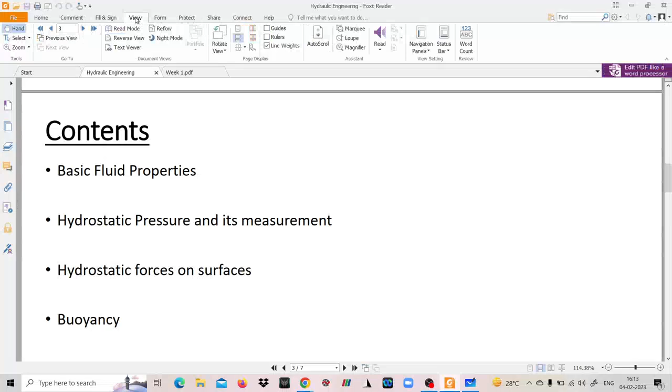Just one second. Yeah.

After that, we have hydrostatic pressure and its measurement. So what is the meaning of this term hydrostatic? It basically means when the fluid is at rest. So whenever the fluid is at rest, what are the different associated phenomena? What are the hydrostatic forces that the fluid incurs? All these things are covered in the second topic, which is hydrostatics, or when you say the fluid is at rest.

Then we have hydrostatic forces on surfaces. So when a surface is submerged vertically in a liquid, when it is submerged horizontally, when it is submerged in a liquid making some angle, all these cases come under hydrostatic forces on surfaces.

Then we have pressure and its measurement. What is actually fluid pressure? What is Pascal's law? How is fluid pressure measured using different types of manometers? All these things are discussed in unit 2 and unit 3. Then one very important aspect is buoyancy - what are buoyant forces, what is the center of buoyancy, how do you analyze the buoyant forces, all these things are discussed.

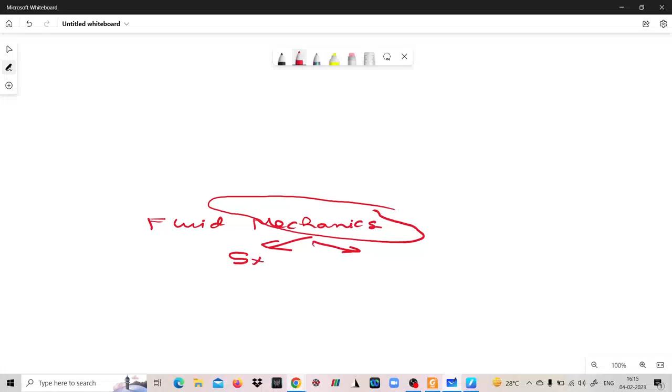Then we have fluid kinematics. Now this is important. Whenever we are studying fluid mechanics, or for that matter any mechanics, whenever we look at this word mechanics, there are two aspects to it. One is statics, and the other part is dynamics.

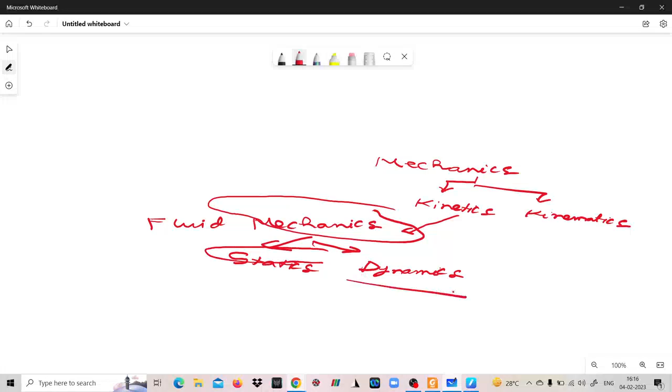So statics and dynamics - as the name suggests, but before that there is one broader aspect. Mechanics is basically divided into two subdivisions before statics and dynamics: one is kinetics, and then kinematics. This kinetics is further subdivided into statics and dynamics. So what is the meaning of these words? In mechanics, we study the force as well as the motion as well as the responsible forces. Kinetics deals with the forces, that is, whenever you apply some force on a body, what is the resulting motion - everything is considered in kinetics.

However, kinematics deals with only the velocity and acceleration, that is the motion portion, not the forces responsible for that motion. Kinetics means where you study the forces responsible. We have two domains basically: statics, when the body is at rest, and dynamics, when the body is in motion. So if you look at this, then we have fluid kinematics.

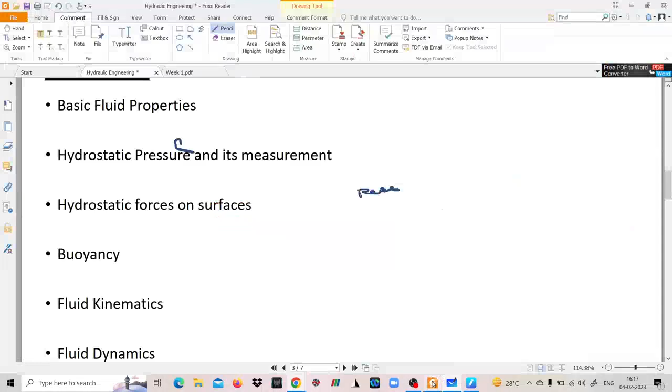In fluid kinematics, we study fluid velocity, acceleration field, potential function, stream functions. All these things are considered in fluid kinematics, but we do not consider the underlying forces. The underlying forces are studied in this particular chapter, which is fluid dynamics.

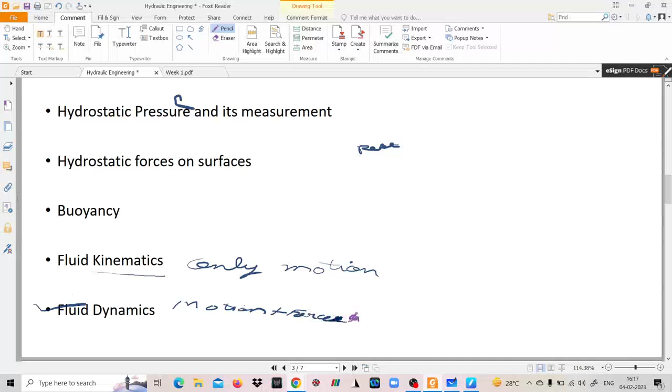So this kinematics is basically only motion aspects, only motion. And here in fluid dynamics it is motion plus the forces which are responsible for causing that motion, that is being studied in fluid dynamics. After that we have Reynolds transport theorem.

Now Reynolds transport theorem is again a very important theorem. Why is this a very important theorem? Because whenever you study fluid mechanics, there is a concept of system, and there is a concept of control volume.

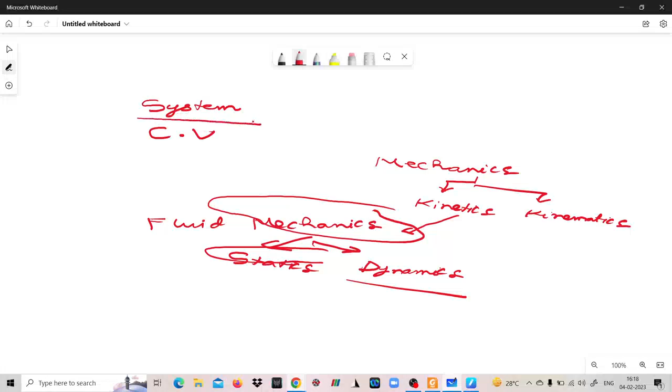Now what is a system? A system is basically, whenever you are studying or analyzing a problem, something whose mass is always conserved. However, in control volume, the mass flows across the surfaces, the mass flux is there.

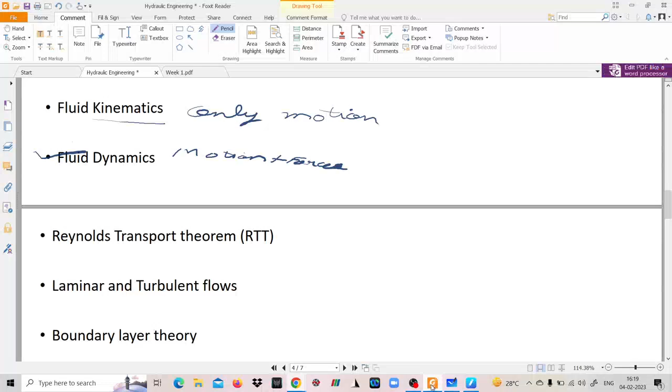So Reynolds transport theorem, that is RTT, gives you a mathematical form of how the system parameters are related to the control volume parameters. In simple words, all the conservation equations - conservation of mass, linear momentum and angular momentum - can be derived from the Reynolds transport theorem, putting appropriate terms for the different conservation equations. Then next we have laminar and turbulent flows.

Laminar and turbulent flows with respect to pipe are discussed in this course. For pipe flow, it is decided by the Reynolds number, given by rho v d by mu, where rho is the density, v is the average velocity across the pipe cross section, d is the diameter of the pipe taken as characteristic length, and mu is the coefficient of dynamic viscosity.

For laminar flow, this Reynolds number is less than 2000, but only in case of pipe flow. For turbulent flow, this Reynolds number is greater than 4000. And in between 2000 and 4000, we call it transition. Then we have boundary layer theory.

So what exactly is a boundary layer? You will get to know about all these things in detail when you go through the lectures. But just to give you a brief idea of what all is included in the course: a boundary layer forms when a fluid flows over a solid surface.

Now, when the fluid flows over a solid surface, there is something known as no slip condition, which you must have come across if you have already gone through the lecture of week 1. So what is no slip?

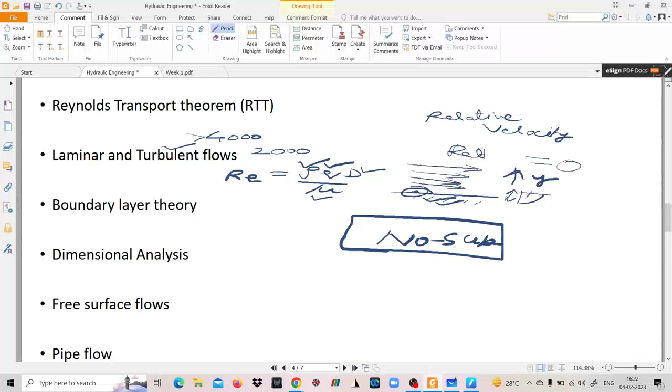Then we have dimensional analysis. Whenever we perform experiments related to fluid mechanics, say you want to study the motion of sediments which lie on a river bed, and suppose you want to perform some experiments related to it, then whenever you are conducting experiments, it is very important that this dimensional analysis is done.

Because you cannot replicate the actual dimensions of a river. Suppose you consider river Ganga or river Brahmaputra, you cannot replicate the actual river which has a very large width and length in your lab. So in our lab we use scale models, but how much that scale should be, so that the model you have constructed actually replicates or gives a good prediction for the actual field cases, you need to have some scale values of the parameters. So how that scaling is done depends upon this particular topic, which is dimensional analysis.

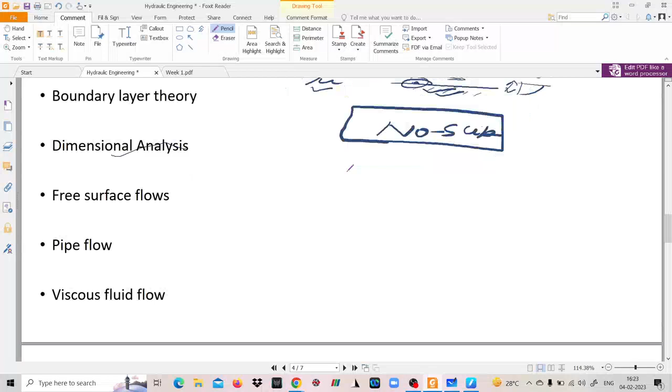Then we have free surface flow. What exactly is free surface flow? Free surface flow is also known as open channel flow. Whenever a flow takes place where the free surface is subjected to a constant pressure, and in most cases it is atmospheric pressure, we call it free surface flow. For example, flow in rivers or oceans are examples of free surface flow. In case of a pipe also, if there is a circular pipe...

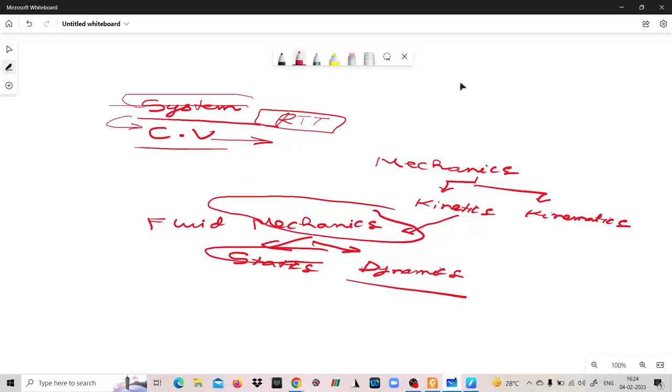Say there is a pipe, roughly circular, and it is not flowing full. This is the free surface, and the pressure here is atmospheric pressure everywhere on this surface, so this is also an example of free surface flow. But if the pipe is flowing full, then it is not a free surface flow, then it is a classic example of pipe flow.

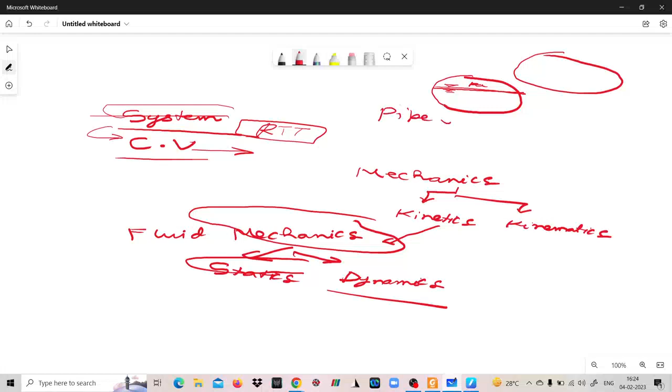After this, we have viscous fluid flow. Now, viscous fluid flow is a very fundamental chapter, because here you will be looking into the various deformations, how viscosity is important, and what are the consequences of fluid viscosity. All these things will be discussed in viscous fluid flow.

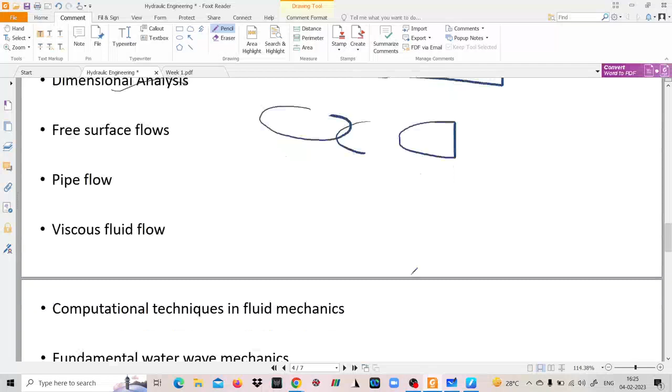Then the last two units, computational techniques in fluid mechanics and fundamental water wave mechanics, might be two new chapters which are generally not included in our college curriculum for civil engineering courses, but for those from ocean engineering or naval architecture background, they might have some idea.

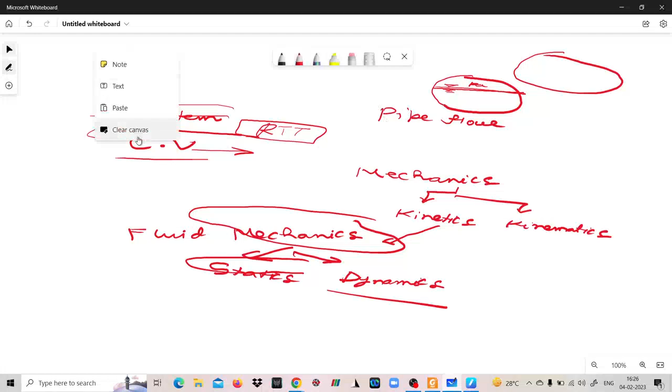Now, these computational techniques in fluid mechanics - nowadays lots of software are available which are used for studying various fluid flow situations. What these softwares basically do is, whenever we solve any problem on mechanics, we try to apply the conservation equations.

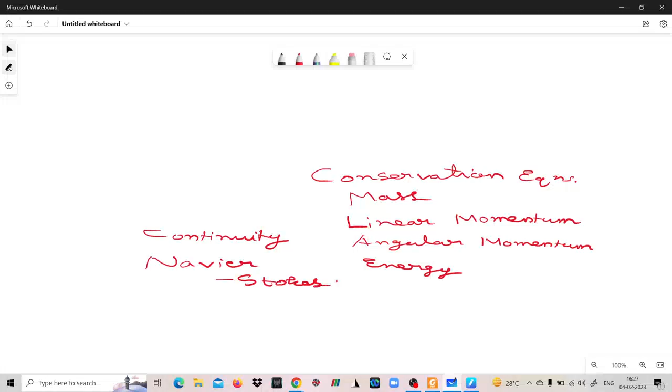Now, what are these conservation equations? These are conservation of mass, conservation of linear momentum, then we have conservation of angular momentum, and we have conservation of energy. In case of fluid, the conservation of mass equation is known as the continuity equation, and the conservation of linear momentum, after applying suitable assumptions relevant to fluids, is the Navier-Stokes equation.

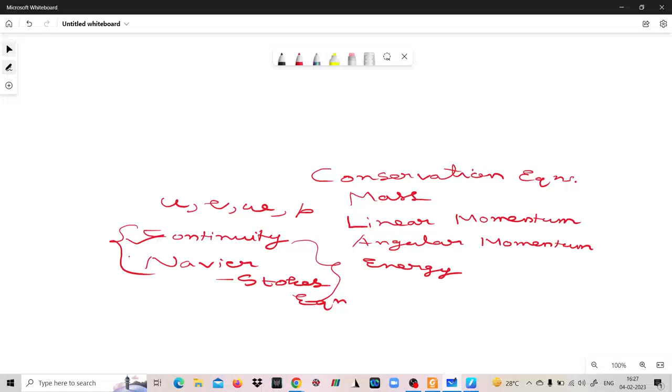So the continuity equation and Navier-Stokes equation form a system of differential equations where you have four different unknowns, considering incompressible flow: u, v, w, that is the velocity field, and p, pressure. We have four different equations - one is the continuity or mass conservation, and three equations are the Navier-Stokes equations, because momentum is a vector quantity, so for each direction we have one: along x-axis, y-axis, and z-axis. So these three equations plus one continuity equation give us four equations, and we have four unknowns.

However, exact mathematical solution to this system of equations is not available till date. In fact, whether a unique solution exists for this particular system of differential equations is still in question. So that's why whenever we study any complex fluid flow situation, we

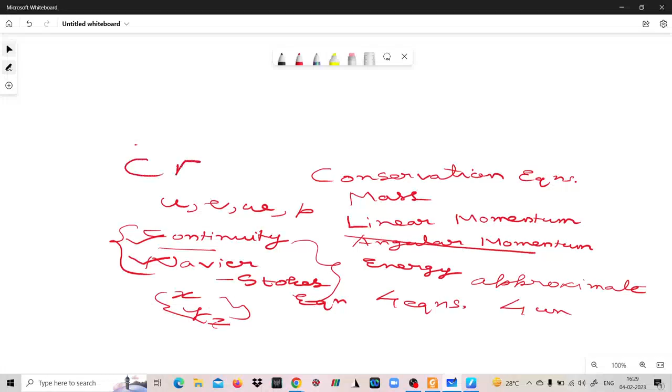try to obtain approximate solution to these equations by some suitable numerical method. So whenever we are using some numerical technique, we are not finding a solution which is exact, but an approximate solution. This entire approach is known as CFD or computational fluid dynamics.

Now you will see in this particular course, if we simplify the Navier-Stokes equation under certain assumptions, for example in pipe flow or flow between two parallel plates, this Navier-Stokes equation becomes so simple that for those cases there is an exact solution. But if you consider the entire Navier-Stokes equation in general, in totality, then there is no exact solution available, and we go for computational techniques.

Now there are different techniques available for the solutions, which include FDM, the finite difference method. Then we have finite volume method. Then we have FEM, the finite element method. Apart from this, there are many other methods like spectral element method, boundary element method. So there are different methods available. We also have some meshless techniques like smooth particle hydrodynamics.

So there are different techniques, but these are all approximate. All these techniques give approximate solutions to the Navier-Stokes equation. So a very basic introduction to these CFD techniques is provided in this unit, which is computational techniques in fluid mechanics. And the last one is fundamentals of water wave mechanics.

So water wave mechanics is relevant to ocean engineering. Now if you consider an ocean, apart from the water current, that is the flow, we also have water waves, and these water waves have significant impact on the flow hydrodynamics associated with any ocean or coastal engineering structures or any ocean engineering phenomena.

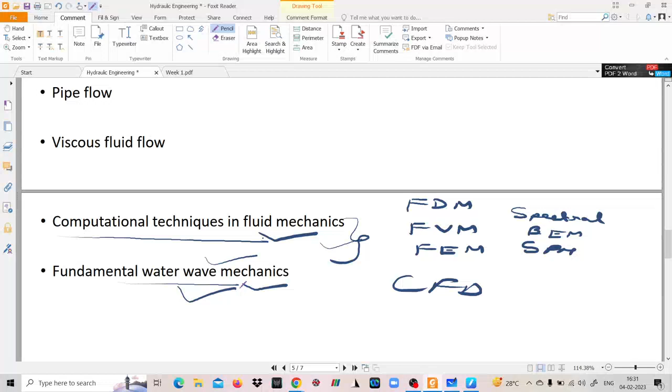Maybe in higher studies you'll find these subjects, but at UG level, if you look at the entire course curriculum, it is very difficult to get these two chapters in the curriculum of civil engineering. So these last two units are the specialties or USP for this course. So this is the fundamental.

Now, with a brief introduction to the contents of this course which you'll be learning, I would like to tell you that the live sessions will be based on the problems associated with each one of these units. Now what are the purpose of these live sessions?

It is very important, there should not be any confusion. The purpose behind these live sessions is to provide you with some additional contact hours for problem solving. As you know, at the end of every week's lecture, you need to solve some problems as part of the assignment. And finally, if you appear for the certificate exams, there also you need to solve problems. So these live sessions are meant to give you confidence where you will be solving some additional problems.

Now, during these live sessions, it is also intended to highlight the critical topics where you need to put some extra effort, not only for this particular NPTEL course, but also for other competitive exams like GATE or engineering service exams. So which topics need further effort, which topics are important, from which topics you can expect questions - all these things will be discussed.

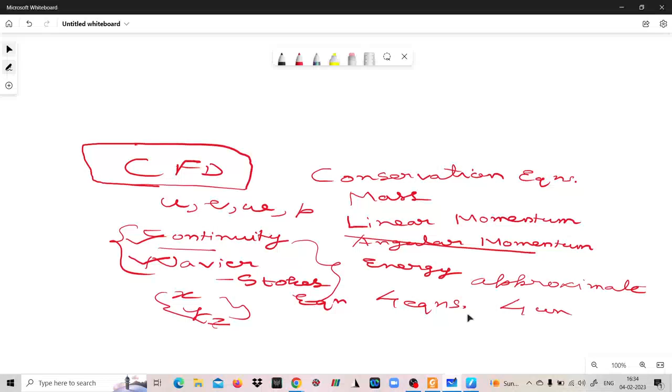So what is a fluid? To answer this question, we should begin from the states of matter. The three states of matter from the engineering point of view are solids, liquids and gases. The obvious difference that all of us know is that in solids the molecules are very closely packed. In gases, molecules are very widely spread, and in between we have liquids.

Now out of these three states of matter, you must know that gases and liquids are considered as fluids. So the question is, why are gases and liquids termed under one term which is known as a fluid? So with this there comes the basic definition of a fluid.

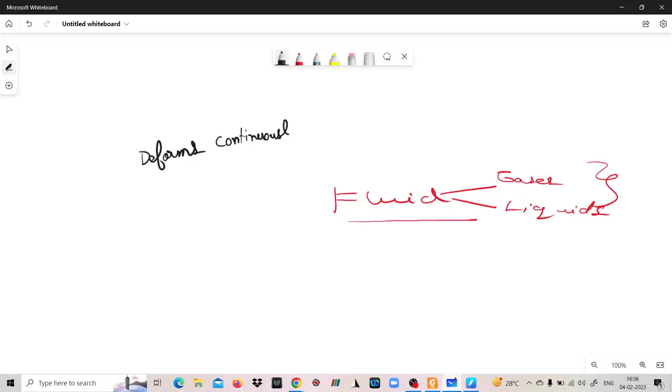What is the basic definition of a fluid? The basic definition of a fluid is that a fluid is a substance that deforms continuously under the action of a shear force, however small the shear force may be.

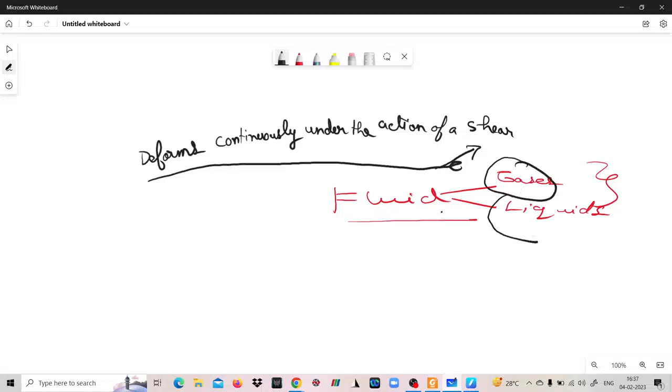So that is something which differentiates a fluid from a solid. This particular property, that it deforms continuously under the action of a shear force, is exhibited both by gases and liquids. That's why these two are termed together as fluids.

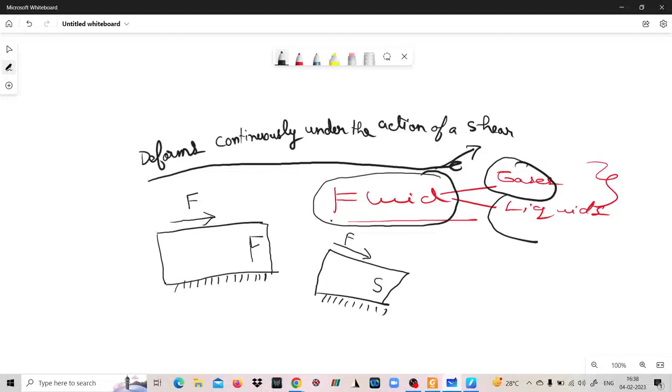Now if this is the case, let us look at the basic idea behind Newton's law of viscosity. You consider that there is a fluid block which is fixed at the bottom, and similarly there is a solid block which is fixed at the bottom. Now on the top surface you apply a shear force F of the same magnitude for both. So this is our fluid F, and this is our solid S. Dimensionally these blocks are the same, and you have applied a shear force of the same magnitude on both blocks, the fluid block and the solid block.

So what will happen? Shear deformation, or angular deformation, will start to occur. Here also shear deformation will occur. But what is the difference between these two?

Once you remove this shear force, in case of the solid, what will happen? It will come back to its original position. There may be slight deformation, there may not be. This will depend upon the elastic limit. Whenever you are providing the deformation, if it is within the elastic limit, it will regain its original position. And if it has exceeded the elastic limit, it will still come back, but with slight deformation.

But what will happen in case of this fluid? In case of the fluid, even if you remove the shear force, do you expect that this fluid will come back to its original position?

No, it will not come back, but it will keep on deforming. So in case of solids, if the shear strain is theta, then force, or shear stress (force by area), denoted by tau, is directly proportional to theta. Stress is directly proportional to strain.

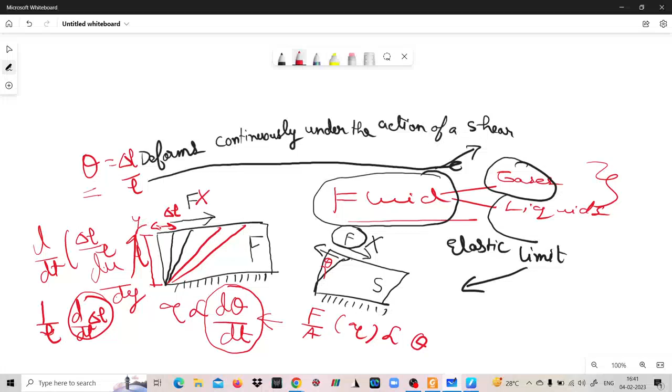So this is the basic idea of how Newton's law of viscosity came into picture. Your first unit covers basic fluid properties. Apart from fluid properties, Newton's law of viscosity is very important. There is a graph between stress versus rate of strain, which, depending on the shape of the figure, tells you very carefully whether it is a Newtonian fluid, a non-Newtonian fluid, or a Bingham plastic.

So it could be an ideal solid or an ideal fluid. Just to recapitulate, the graph looks something like this: tau (shear stress) on one axis, du by dy on the other. A line passing through the origin of this graph represents a Newtonian fluid. These others are non-Newtonian fluids — something like this is an ideal plastic, this is a Bingham plastic, this is not an ideal plastic.

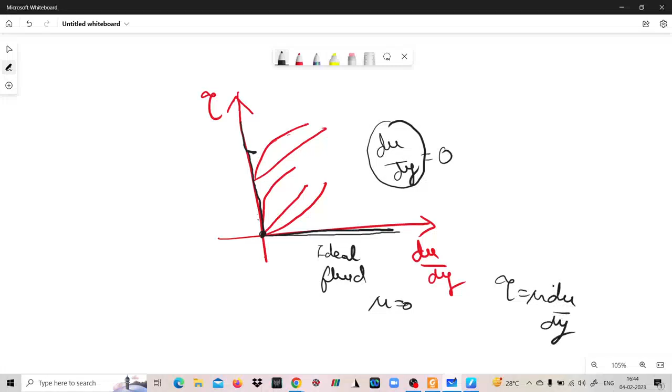Or if you consider the most general form for shear stress, it is tau equals A plus B times (du by dy) raised to the power n. Here B is nothing but mu. If mu equals 0, then tau equals A. This represents the plastic fluid.

But if it is not an ideal plastic, and if it is a Newtonian fluid, then we can write this as tau equals mu du by dy. And if mu equals 0, then whatever the value of du by dy, tau is always 0. So the du by dy axis represents an ideal fluid, and the tau axis represents an ideal solid.

This graph is very important, because in competitive exams you might be given this graph with points labeled A, B, C and D, and in the options it will ask what is A, what is B, what is C, what is D. So this particular graph is very important.

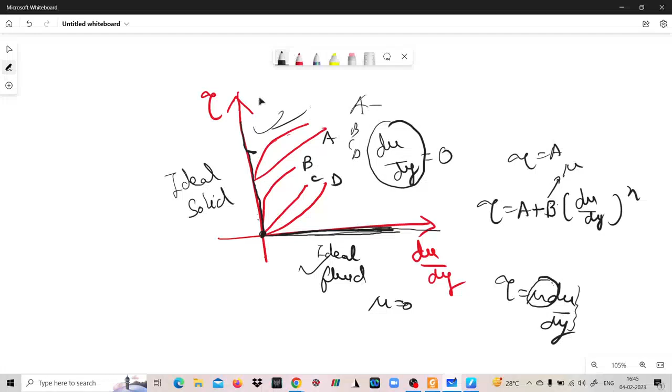Now the next part of the question: what is the difference between fluid mechanics and hydraulics? Fluid mechanics is basically the study of fluids, both fluids at rest as well as fluids in motion as a whole. A comprehensive coverage of the entire fluid flow phenomenon is fluid mechanics.

But hydraulics is different. Fluids consist of both gases as well as liquids, but in civil engineering, what are the most important topics where fluid mechanics is important? It is river flow, ocean engineering or coastal environments, flow in porous media like groundwater hydrology, rainfall. Everywhere water is involved - the various aspects of force and motion of water, that is termed as hydraulics.

However, in order to understand the motion of the fluid, it is no different from understanding the behavior of water, or the behavior of a fluid in general. Only when you substitute the density and viscosity with the values for water, you get hydraulics. Otherwise everything is the same. One important property is that we consider water incompressible, so all the equations for incompressible fluid mechanics are valid for water. Hydraulics can be considered as a subset of fluid mechanics, where we deal with the flow of water. That is the only difference.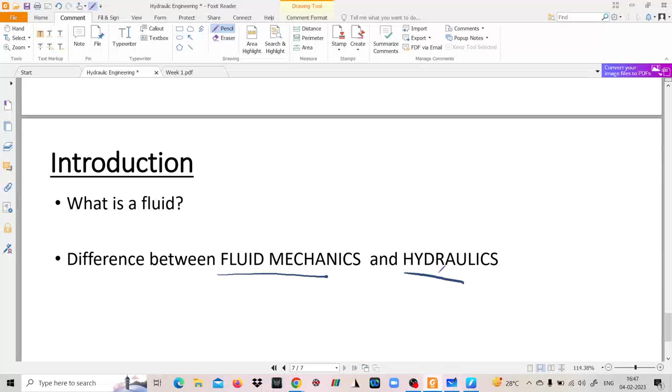So with this our introduction is over. Next we'll move to week one's problem solving session. I hope you have gone through the lectures of week one, and with this let us start with the problem solving part.

So this is the first problem. You have to determine the mass density, specific volume and specific weight of a liquid whose specific gravity is 0.85. So you have to determine the mass density, specific volume, specific weight, and the specific gravity is given to you. Please try this problem. I'm giving you a few minutes, and then we'll discuss the solution. It is a very simple problem, and if you have gone through the lectures already, this should not take much time. So please try from your side, and then we'll discuss the solution.

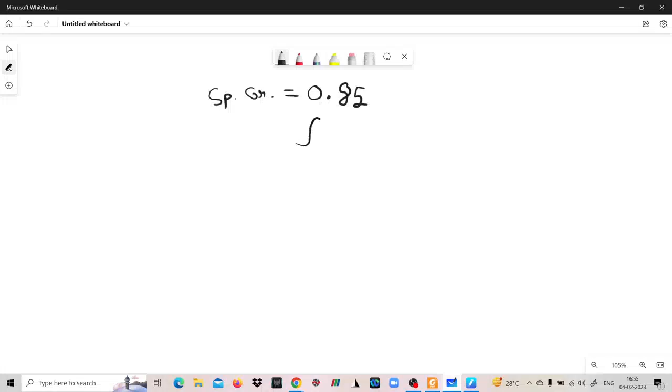So in the problem, it is given that the specific gravity is equal to 0.85, and you are asked to calculate the density, then the weight density, which I'm writing as gamma, and then the specific volume, which I'm writing as V cross. So these three things you need to calculate: rho, gamma, and V, that is specific volume. Now you need to start with the only value given to you, that is the specific gravity.

So what is specific gravity? Specific gravity, say I'm writing Sg, is the ratio of the density of any matter under consideration divided by the density of water. Now here it is very important to remember one thing.

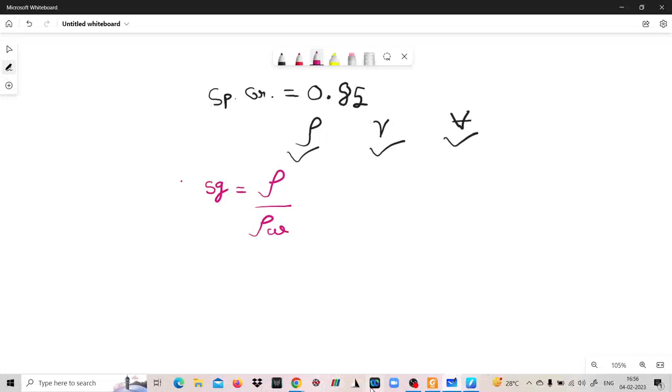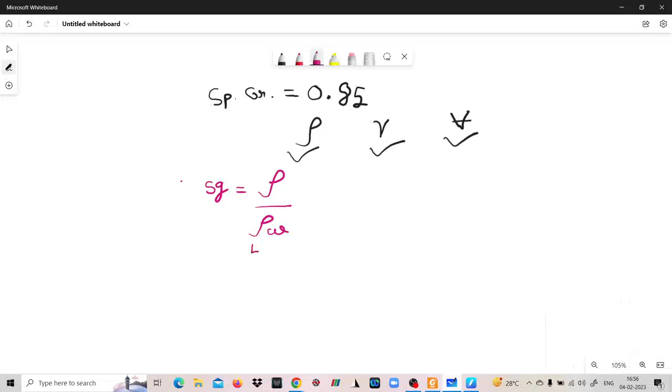Dinesh obtained 850 kg per meter cube, which is fine. But when he obtained this value, what is the assumption? The assumption is that the density of water at standard temperature and pressure is 1000 kg per meter cube. So if nothing is given in the question, you can safely take this value as 1000 kg per meter cube, but you should always read the question very carefully.

For this problem, since nothing was mentioned about the density of water, taking a value of 1000 kg per meter cube is okay. But sometimes in questions, separately the density of water might be given as 998.2 kg per meter cube, or sometimes the specific gravity with respect to sea water is given. So you should read the question very carefully.

Don't blindly use the value of 1000 kg per meter cube. In most cases it will not cause any problem, but sometimes in competitive exams they may intentionally supply you with a value of density of water different from 1000 kg, because our tendency is to generally use 1000 kg. So in order to create confusion, they may supply a different value. Whatever value is given in the question, you use that value. Otherwise you can use 1000 kg per meter cube.

So the specific gravity, rho by rho w, is given as 0.85. For this particular problem, since nothing else is given, you can safely assume the density of water to be 1000 kg per meter cube. Therefore rho will be equal to 0.85 into 1000, which is rightly mentioned by Dinesh, it is 850 kg per meter cube.

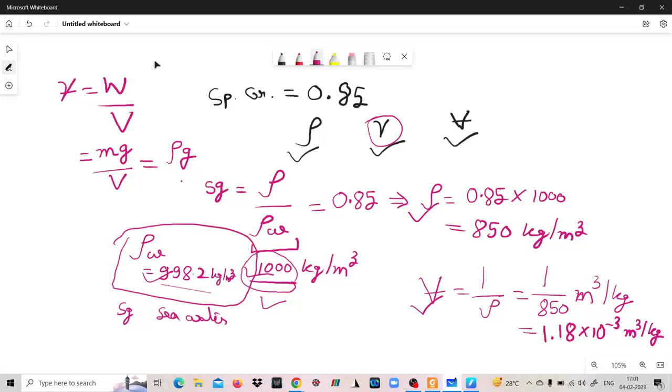Now weight per unit volume, weight can be written as mass into acceleration due to gravity divided by volume. Mass by volume is density. So basically rho g is this specific weight. So gamma equal to rho g is the specific weight.

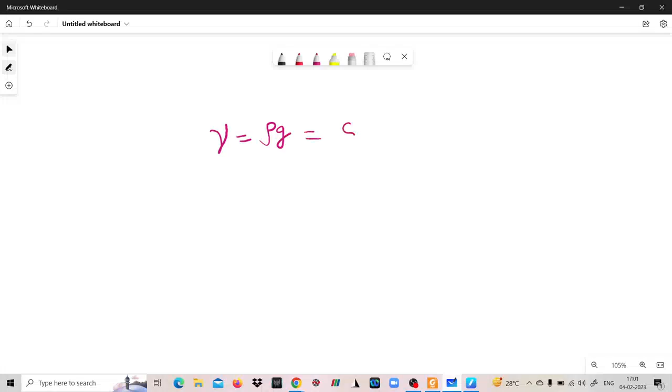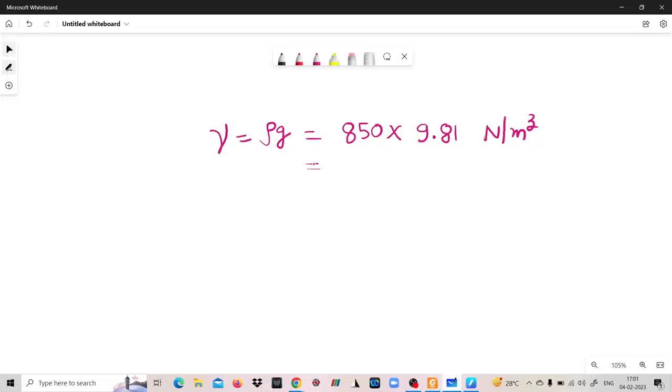The value of rho is 850 kg per meter cube, into g is 9.81. Since everything is in SI, it will be Newton per meter cube. 850 into 9.81 is around 8338.5 Newton per meter cube, or if expressed in kilonewton, it will be approximately 8.34 kilonewton per meter cube. You can recheck the calculations, no problem, but the idea is this.

Now as Dinesh has already mentioned the answer, density is 850, fine. Specific weight is 8.3 kilonewton per meter cube, fine.

Here I would like to mention one more thing. Similarly to the case of density of water, the value of g, if you sit for competitive exams, they will definitely supply you with the value of g. Whatever value of g is supplied to you, you use that value. If a value of 9.81 meter per second square is given, you use that value.

Or if a value of 10 meter per second square is given, use that value. Before solving the problem, especially for competitive exams, please look carefully at the values and units that have been supplied to you. Whenever you read a question, make a list on a rough page of all the variables and their values given to you - variable v1, v2, v3, whatever is given. This will avoid unnecessary errors, so please do that.

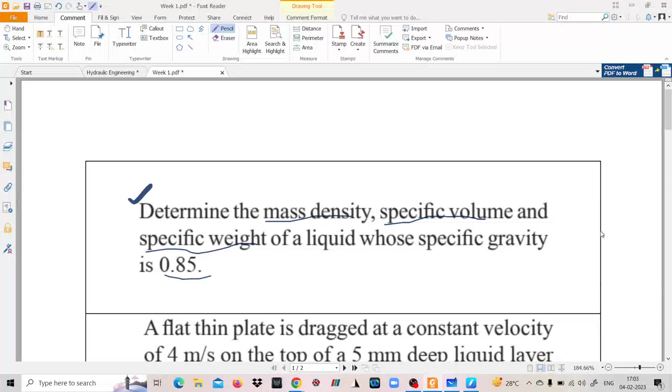For the second problem: a flat thin plate is dragged at a constant velocity of 4 meter per second on top of a 5 millimeter deep liquid layer of viscosity 20 centipoise. If the area of the plate is 1 meter square, find the drag force. Assume the variation of velocity in the liquid to be linear. The answer is already supplied here, 16 Newton. As I told you, the final answer is not important - the approach, or how we have solved the problem, is of utmost importance here. Please take some time and try to solve this problem, then we will discuss it.

And wherever possible, please draw a rough problem sketch. Try to visualize the problem and then go for solving. Look at the data carefully - what are the units? Viscosity of 20 centipoise is given, so how will you use that viscosity? What exactly is that viscosity - whether it is dynamic viscosity or kinematic viscosity - everything you need to decide by looking at the unit. Look at the question carefully and then we'll try to solve the problem. Take some time, try to solve it from your side, and then we'll discuss.

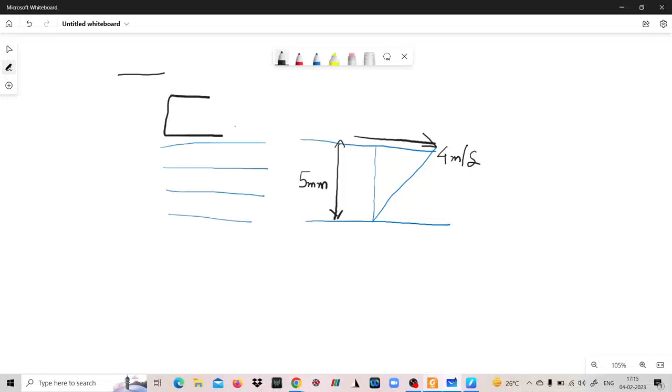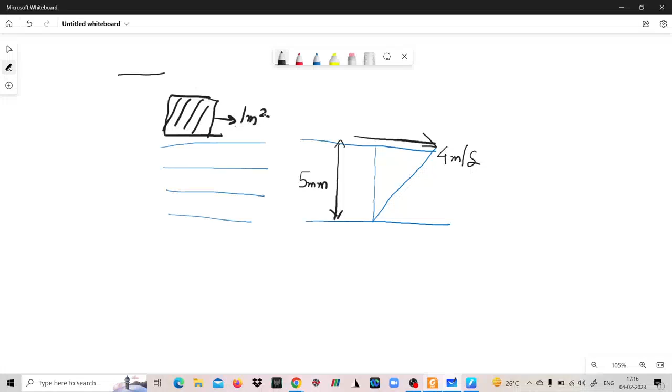It is given to you that the area of the plate, that is, since we are only looking at the side view, if you look from the top, the plate will have some area. The area of this plate is 1 meter square.

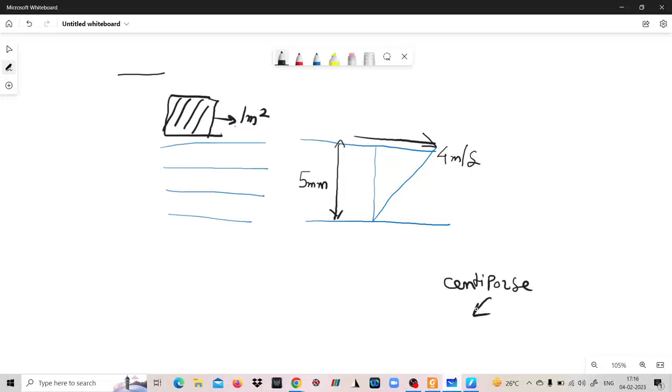And apart from that, the viscosity is 20 centipoise. Now centipoise, what type of viscosity is this?

Is it dynamic viscosity or is it kinematic viscosity? What type of viscosity is this? Dynamic or kinematic? Dynamic.

Good. So this is the unit of dynamic viscosity. The unit of dynamic viscosity in SI unit is Newton second per meter square, and if you convert this into CGS, in short we write that as poise. Now in the question it is given as 20 centipoise, if I am not wrong.

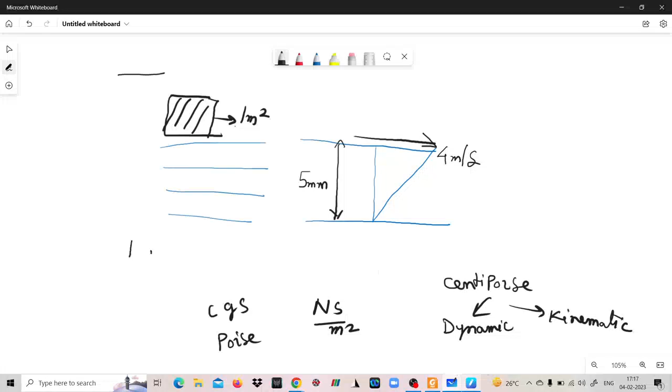So what is the relationship between poise and Newton second per meter square? 1 poise is equal to how much Newton second per meter square? Dinesh, how much have you used? 100. Poise and Stokes, sorry, poise and the relation between poise and Newton second per meter square.

Is it really 100? I don't know, sir. Okay, Dinesh, fine. You don't know, that is a different part. But for the problem that you solved and obtained the answer, what value did you use? Did you use one poise is equal to 100 Newton second per meter square? Is this what you have used? Okay. Then I don't know how you obtained the answer.

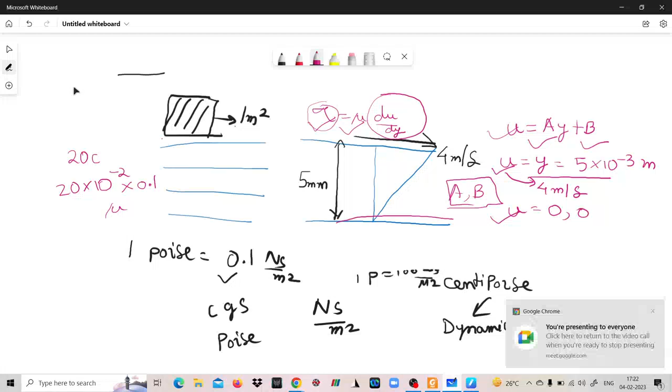So u is equal to a y plus b. Now the value of u is 4 meter per second at y is equal to 5 into 10 to the power minus 3 meter, and u is equal to 0 at y equal to 0. So this will be u is equal to 0 at y equal to 0. So when you put y equal to 0, b will be equal to 0.

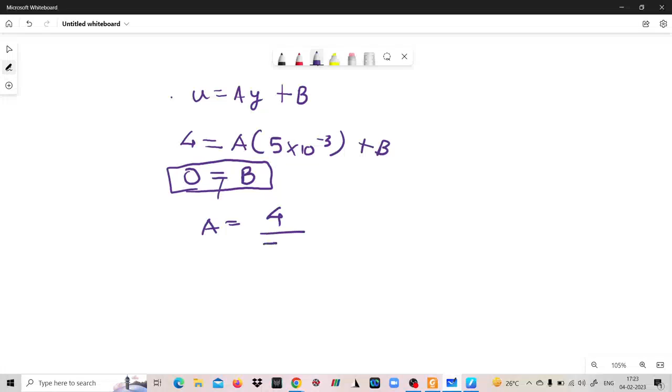And what is the value of a? Value of a is equal to 4 divided by 5 into 10 to the power minus 3, or I can write this as 10 to the power 3.

Let us not skip this thing. 5 into 10 to the power minus 3. This thing can be written as, if I multiply 10 to the power 3 here, I have to multiply 10 to the power 3 in the denominator as well. So this becomes 1, finally we're left with 4 into 10 to the power 3 divided by 5. This is the value of a. So how much is this? 800.

So this value is 800. So what is the variation? u is equal to 800 times y, where y is in meter and u is in meter per second. So what will be del u by del y? Del u by del y will be 800. And what will be tau? Tau is equal to mu del u by del y, or du by dy.

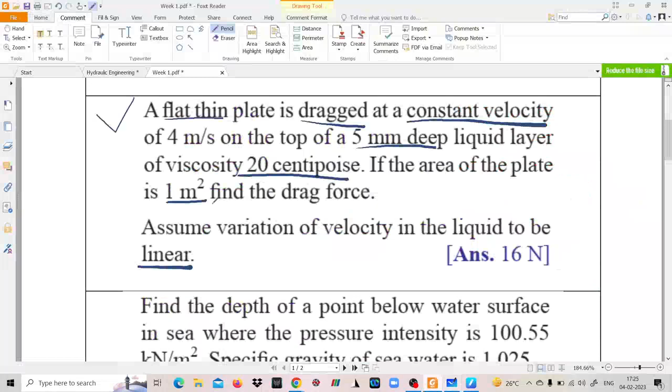But this is not all. Why is this not all? Because in the question it is given that you have to find the drag force, but this is only stress. Shear stress is equal to the force with which the plate is dragged divided by the area of the plate. In the question it is given that the area of the plate is 1 meter square. So that's why the drag force F is equal to tau into A. The value of tau is 16, the value of A is 1 meter square. So finally this gives 16 Newton.

Now is this problem clear? Now Dinesh, I don't know how, by using a factor of 100, you got the answer. That is fine, but if you used the conversion factor of 100, it is not correct. The correct conversion is 1 poise is equal to 0.1 Newton second per meter square. And for kinematic viscosity, the CGS unit is Stokes, and 1 Stokes is equal to 10 to the power minus 4 meter square per second. Now is the problem clear?

Okay, you did it as it is, but why did you write 100, Dinesh? When I asked about that conversion factor, you wrote 100, no? Or maybe that was by mistake, you wrote 100. Anyways, it is fine.

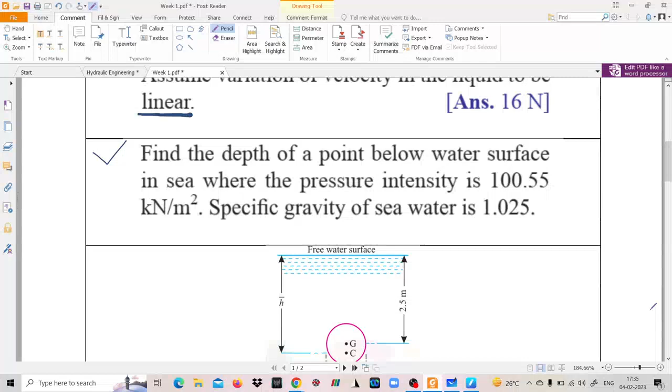So in the question it has been given that, say this is the free surface of the sea, and you have to find the depth to a point P where the pressure intensity is given.

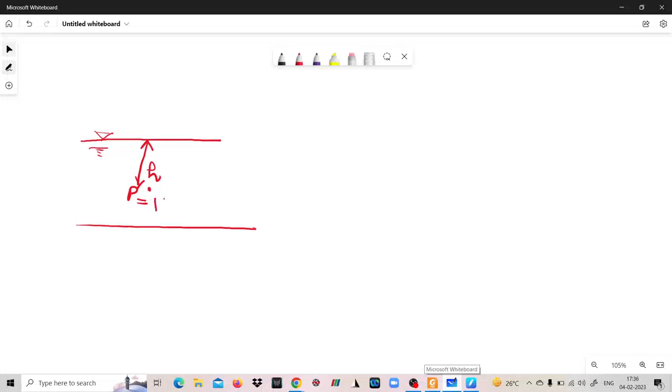The pressure intensity is 100.55 kilonewton or 10 to the power 3 newton per meter square, i.e. pascal. Now nothing has been clearly mentioned in the problem whether it is...

...in terms of absolute scale or in terms of gauge scale. You don't have to worry about this in your exams, because there it will be specifically mentioned. But since here it is not mentioned, I intentionally selected this problem just to make you guys realize the importance of these two terms.

If you remember, what is the difference between gauge pressure and absolute pressure? Say this is the pressure scale, this line represents absolute zero, and this line represents the atmospheric pressure.

Now whenever you have to determine the pressure at any point, suppose here, if you are measuring this pressure with respect to absolute zero, that is from vacuum, then this pressure is known as the absolute pressure.

I am very much sure that you know all these things, but just for clarity and recapitulation purpose I am repeating this. Now, if you are measuring this pressure with respect to the atmospheric pressure, then we call this gauge pressure.

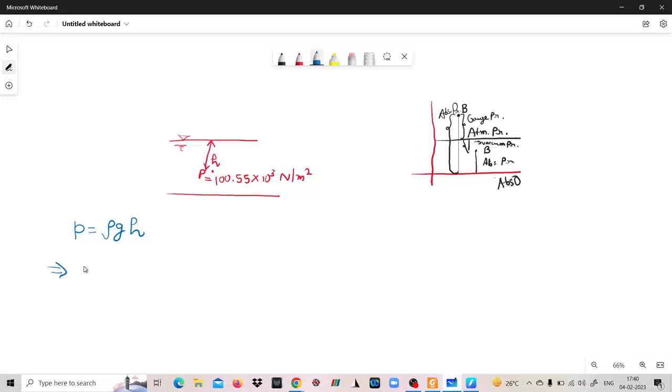Okay, fine. So in gauge scale we know that the hydrostatic pressure distribution is P equals rho G H. The value of pressure given to you is 100.55 into 10 to the power 3 newton per meter square.

Rho is not directly given, it is given that the specific gravity of seawater is 1.025. So if the specific gravity of seawater is 1.025, then the density of seawater will be 1.025 multiplied by 1000, which gives us the density rho, where 1000 is the density of water.

As I told you, if nothing is mentioned, you can safely assume the density of water to be 1000 kg per meter cube, and G as 9.81, multiplied by this height H.

So from this, what will be the value of H? The value of H will be 100.55 into 10 to the power 3 divided by 1.025 into 1000 into 9.81, equal to how much? Let's see.

100.55 into 10 to the power 3 divided by 1.025 into 1000 into 9.81. So this is 9.99 meter approximately. So this is from the gauge pressure point of view.

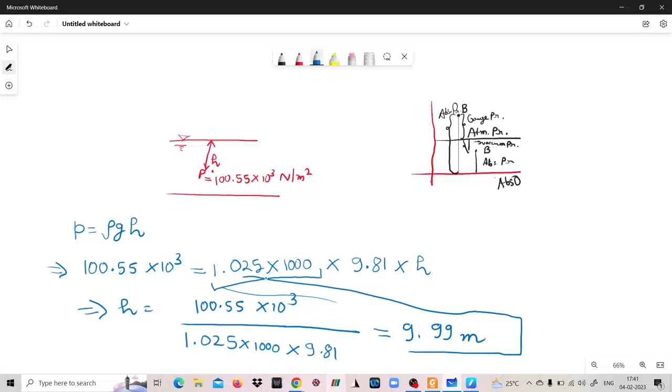Now if you consider the atmospheric pressure consideration...

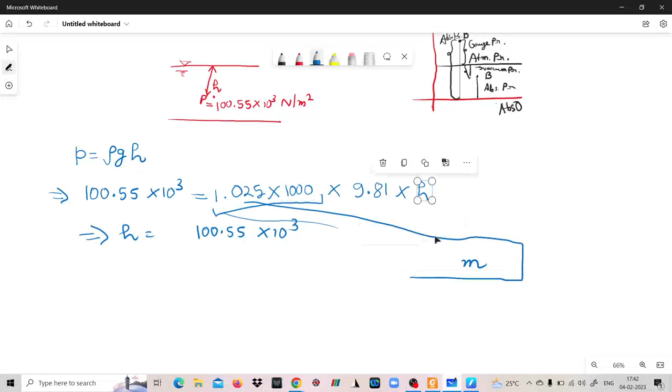I'm not clearing the canvas because the figures are already here, so I'm just deleting the calculations with respect to the gauge pressure.

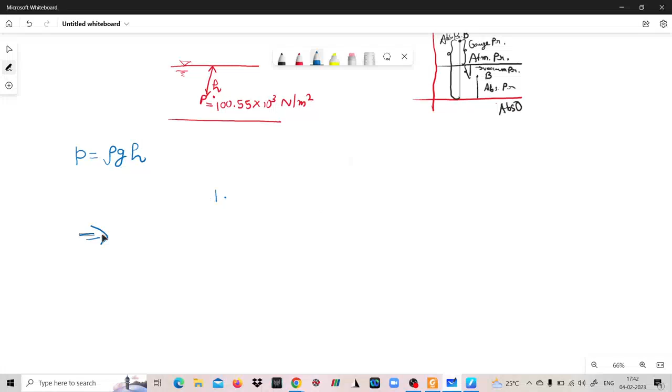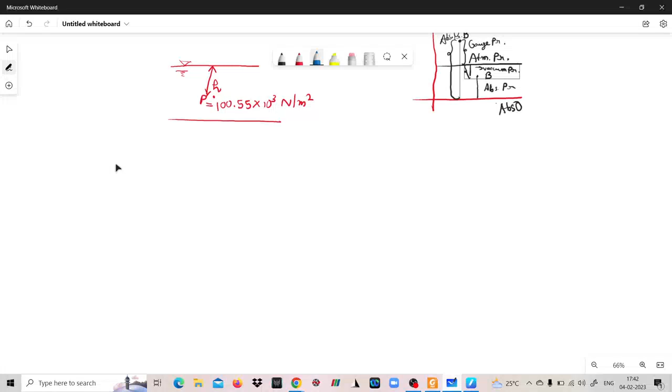Okay. Now, with respect to absolute pressure calculations, let us take this one.

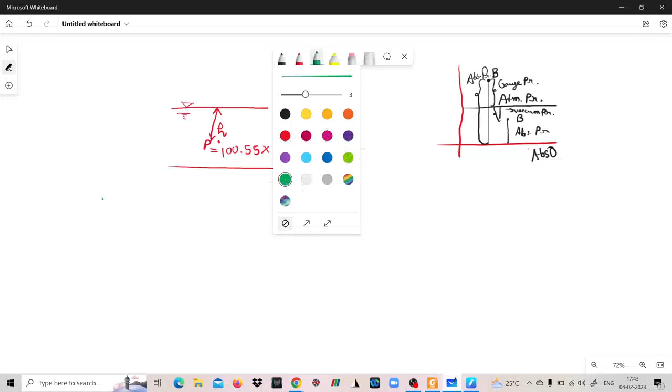On the top of the free surface, it is atmospheric pressure, PA. So at this point P, it will be atmospheric pressure plus the pressure intensity that is given to you. So that will be the absolute pressure. What is absolute pressure? Pressure in excess of the atmospheric. So atmospheric pressure is there plus the pressure because of this fluid lying above this point P.

100.55 into 10 to the power 3 is the pressure at the point. Let us say we don't know whether this pressure is absolute pressure or gauge pressure. We can check this. How we can check means it is not a direct check. What is the value of atmospheric pressure? What is the value of approximate atmospheric pressure? Standard atmospheric pressure? Anyone?

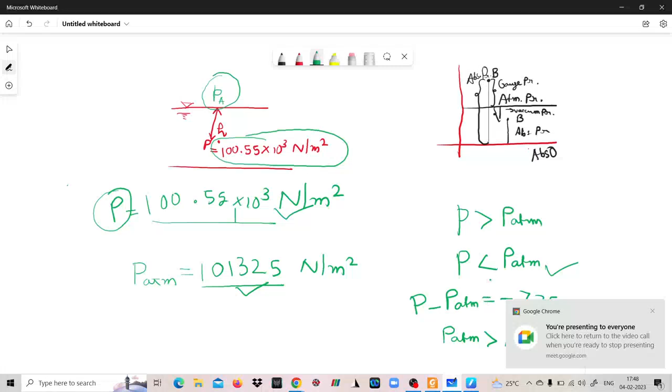So if this condition is correct, then what happens? It means that on a diagram like this, if this is the atmospheric pressure, point atmospheric pressure is greater than P, it means that point P lies here. But is it possible physically? Because it has been already mentioned in the question. See, there are two scenarios possible.

The pressure at point P is less than P atmospheric. One possible explanation is whatever is given to you is actually the gauge pressure measurement. If this is absolute pressure, it means the point P lies below the atmospheric pressure line, which is not possible. Why is this not possible? Because physically this point lies beneath the free surface of the sea. So definitely the pressure is higher, if you think logically, but the calculations are telling you otherwise.

So the only reasonable explanation is that this pressure intensity P given to you is in gauge scale. There is no need to use the atmospheric scale. And if you want to use the absolute scale, then you need to add atmospheric pressure, which will give you the value of absolute pressure at point P. So the answer is 9.9. Is it clear?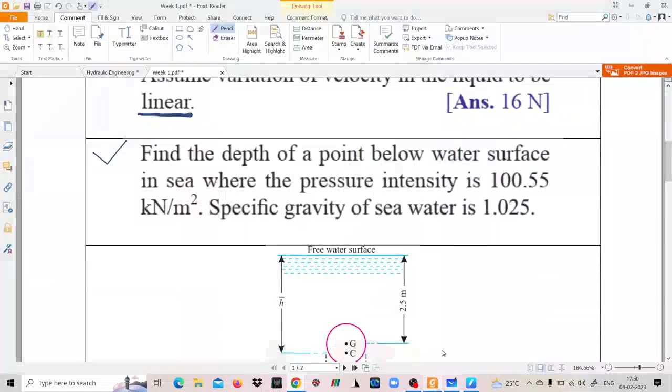Okay, fine. So you need to be very much careful. So let's come to the next problem, which is the last problem for today's session.

A figure is shown here where there is a circular plate submerged vertically inside water. This is the free water surface. The center of the circle lies 2.5 meter below the free surface of the water, and the diameter of the circle is 1.2 meter. You have to determine the total pressure and the position of the center of pressure.

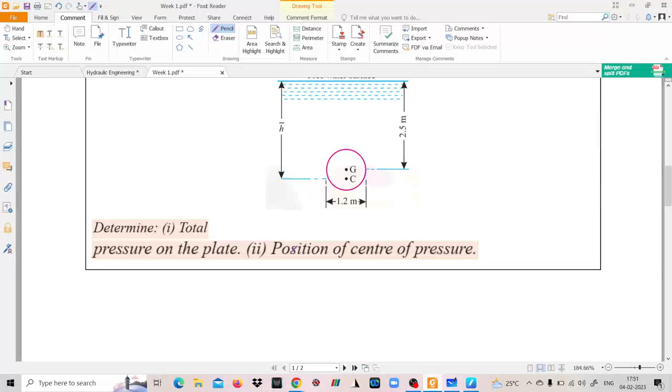So this is basically from the chapter hydrostatic forces on surfaces. It's a very simple problem. You have to directly use the formula, nothing else. So please find the answer and tell me what is the answer. So this is the case.

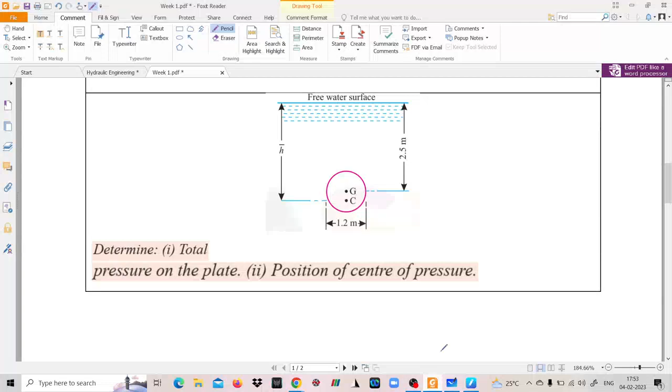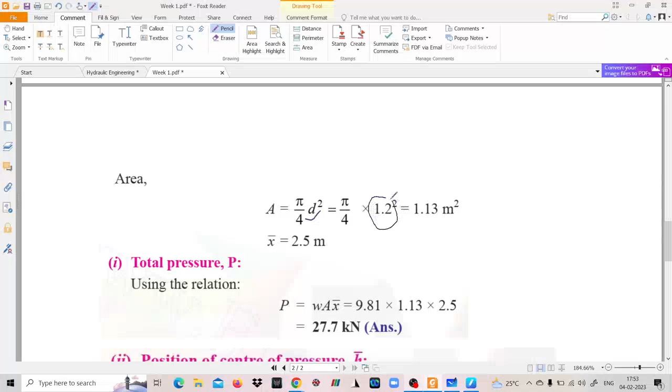Okay, let's see the solution because not much time is left. The area of the plate is given by pi d square by 4. As given in the question, the diameter of the plate is 1.2 meter, so the area is 1.13 meter square.

Now it is given in the question that the center of the circle lies 2.5 meter below the free surface and the plate is vertically submerged. For a circular plate, the center of gravity and the center of the circle of the geometrical shape coincide. So the position of the CG below the free surface, shown by x dash, is 2.5 meter.

So what is the expression for total pressure force? The expression for total pressure force, F, is equal to rho g A x dash.

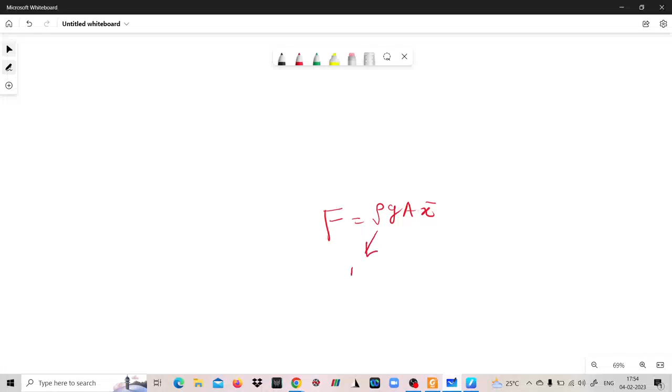In the question it is given that the fluid is water, so the value of rho is 1000 kg per meter cube, and the value of g is 9.81 meter per second square. The area of the circle is pi d square by 4, where d is 1.2 meter, and the value of x dash is 2.5 meter. So everything you need for computing the total pressure force is given to you.

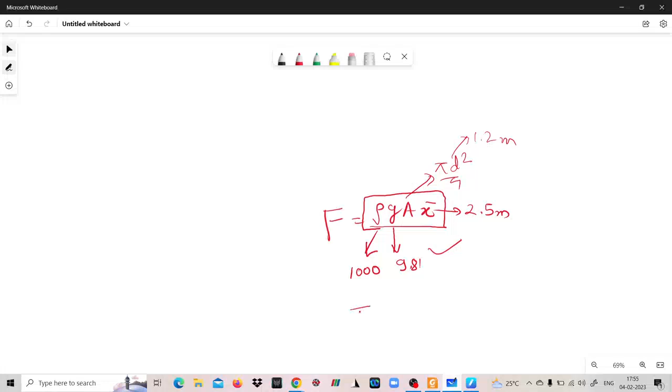So the value is how much? Rho is 1000 into 9.81 into area, which is pi into 1.2 square by 4, into 2.5. Let's calculate: it is 1000 into 9.81 into pi into 1.2 square into 2.5, divided by 4.

So the answer is approximately 27.7 kilonewton, and if you want the precise answer, it is 27,737.12 Newton, so approximately 27.7 kilonewton. So this was about the first part of the problem, total pressure force.

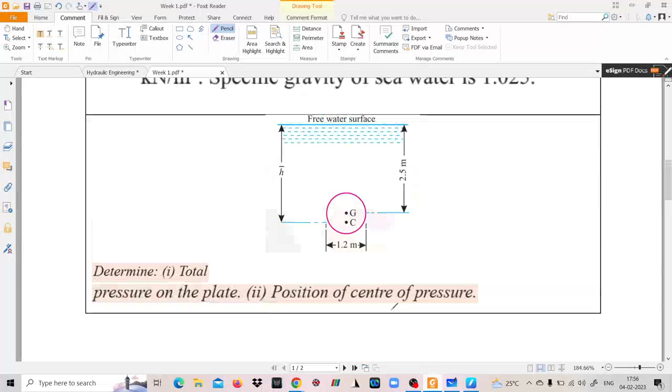What about the second part? You have been asked to calculate the distance of this point C from the free surface. So for that, what is the formula? It is denoted by H dash equals Ig by Ax dash plus X dash, where A is the area of the plate, X dash is the location of the centroid from the free surface, and Ig is the moment of inertia, the second moment of inertia.

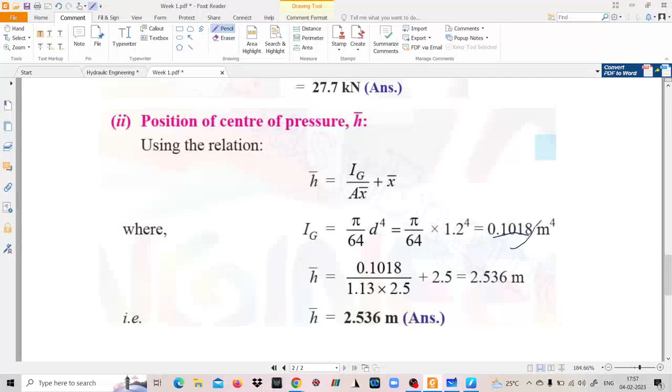So for a circle, what is the value of Ig? The value of Ig for a circle is pi d to the 4th by 64. So pi d to the 4th by 64, you can calculate this, which is approximately 0.1018. You can find the value of h dash, which is 2.536 meters. So this is the answer.

Now this was a very simple problem, but here I would like to suggest something. You have to memorize the equations. For competitive exams, you do not have sufficient time to derive these expressions. So definitely you need to remember something.

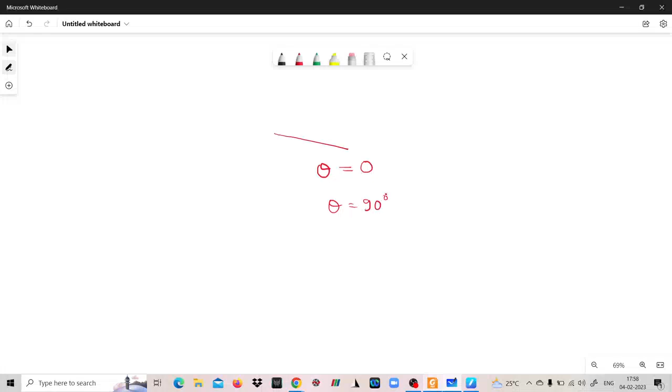So you remember the general case, that is when a general plate is immersed in an inclined position. You remember the general case, which will involve some value of theta. You take theta equal to 0 degree for the horizontal case, theta equal to 90 degree for the vertical case, and theta equal to any other value for the inclined case. You remember that expression?

Apart from that, in any standard textbook of fluid mechanics or hydraulics, you will find a table which, for different geometrical shapes, for example a rectangle, a triangle, a circle, a trapezoid, will give you the position of the centroid and the moment of inertia. Please remember those values, and at the same time remember about which axis that moment of inertia is calculated - is it about the centroidal axis, or the base, or the vertex? You try to remember that. That will save you a lot of time during exams, and this particular chapter is very important for competitive exams, so that's why you try to remember this table.

You take the example of any standard text on fluid mechanics.